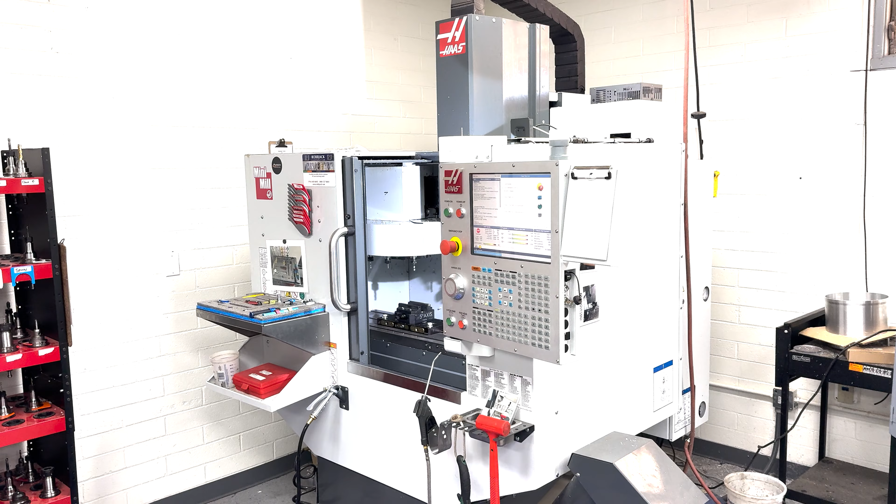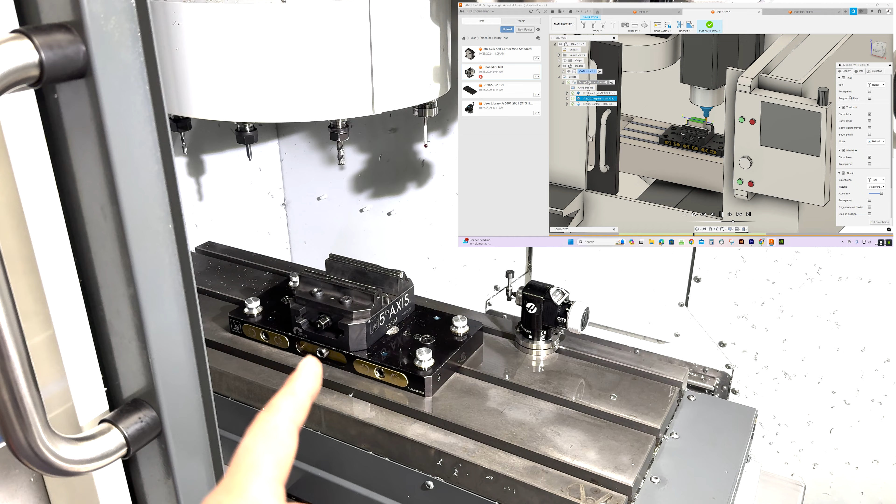Welcome. Today we're going to talk about how to put this machine into the Fusion library so that it will simulate your parts as if it's in the machine. Specifically, we're going to address how we add the OTS, the base, and the vise, and make the vise dynamic so you can set a number for how big the stock is to open and close, and have it all work so when it simulates, it looks like it's running in the machine. Stick around, it's going to be fantastic.

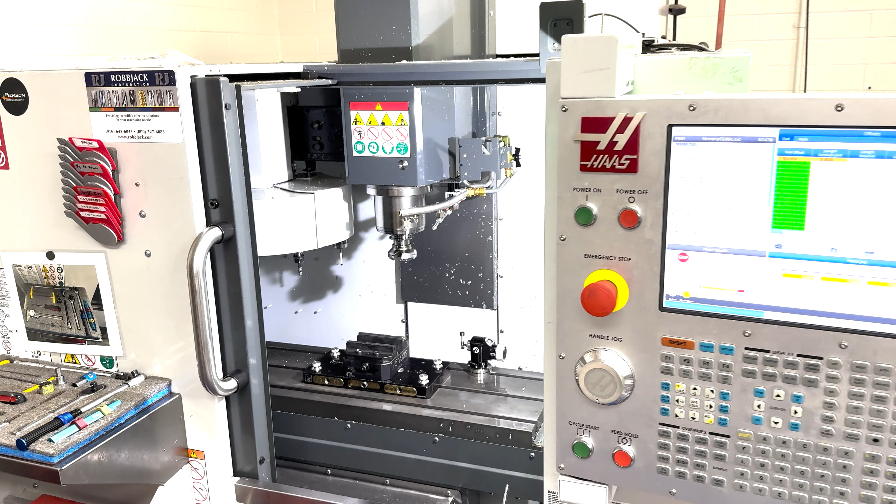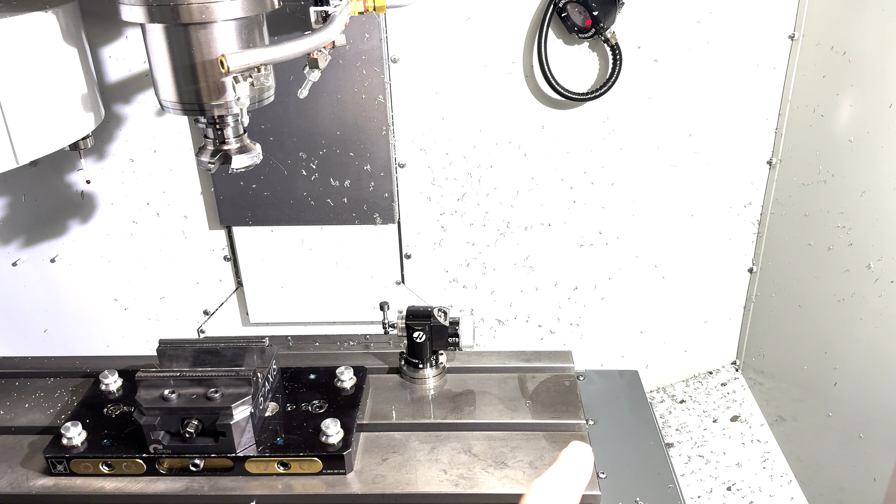Okay, to get started, we are going to take a few measurements. We need to know where the base is on the table as well as the OTS. I've measured from the right-hand side over. The base is 10.5 inches, and the OTS from the right side to the center line is 7 13/16.

So in Fusion, we're going to have to use that 10.5 to place the base plate and that 7 13/16 to place the OTS. But before we can do that, we need to collect all of these peripherals and the machine and get them saved onto your Fusion documents. So let's go ahead and get started with that.

Okay, for those of you that are my students, you will have access to this LHS machine tool library, which is where I have all of the components for our machine shop stored. For those of you out in the World Wide Web, you're going to have to go to websites like GrabCAD, Haas, or even Fusion has the machines, at least some of them downloadable for you, which I'll cover briefly. So let's go ahead and get started.

So those are my students. What you're going to do is you need to copy all of these onto your own. You only have readable versions here, so you're going to have to make a copy, and it's quite simple. You're going to right-click and say copy.

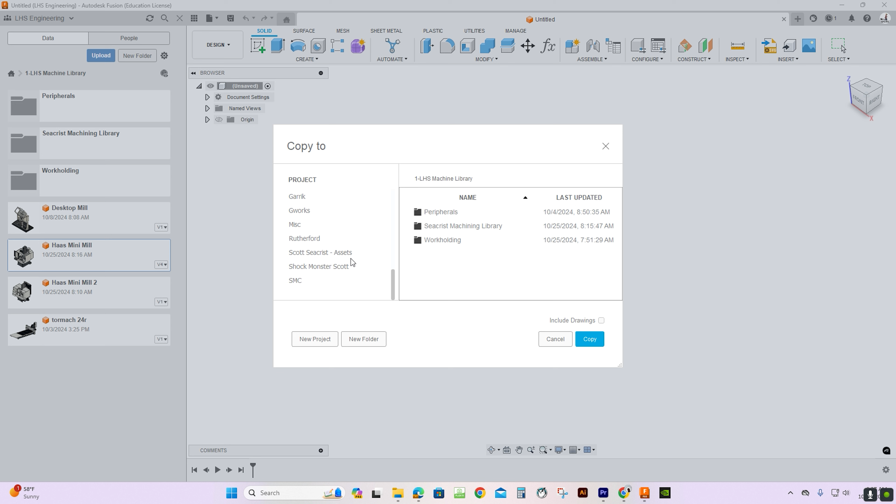And this is our mini mill, and then I made this miscellaneous folder, and I'm going to create a new folder to store all my machine tool parts in, and I'm going to call it machine tool library, and then enter, and then I'm going to open that up, and I'm going to go ahead and make a copy of the Haas mini mill to that location.

And then we're going to need some work holding stuff. So we're going to need a base plate, and on our mini mill it's this one right here. So we're going to go ahead and do copy again, and we're going to put it down there as well.

And then we're also going to need, for this one, from the peripherals, we're going to need the OTS. So go ahead and hit copy. And I'm going to go down here again and save it here. And then the last thing we're going to need is a vise, which is also under work holding and vices.

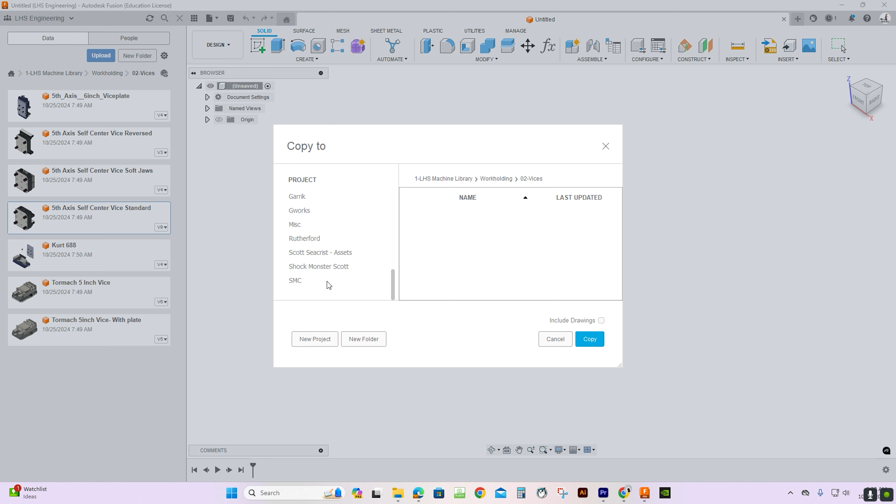For this one, we're going to use this standard 5th axis vise that I'm providing. Copy. And down to miscellaneous and copy it there.

So now we're going to go into our copies and go ahead and open this up. And the first step is we're going to build this machine. So we're going to go ahead and load the mini mill.

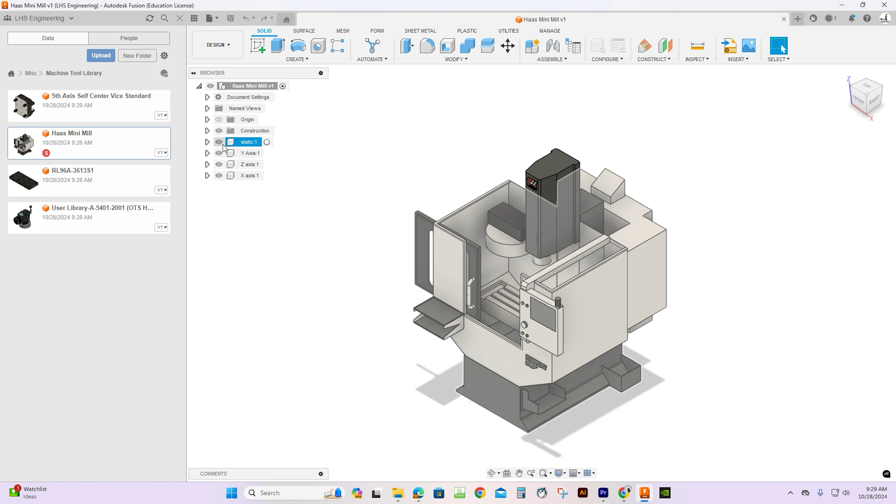And to make our lives a little bit easier, our first step is going to be we're going to turn off statics, which is basically take off all the sheet metal. Now we can see the table. It does exist, it's in the background, so don't worry about it.

The other thing to note is this is all in metric. Haas clearly designs metric, most engineers do. I had an imperial tape measure, but that isn't going to be a big problem, as I'll show you here how we can convert quickly.

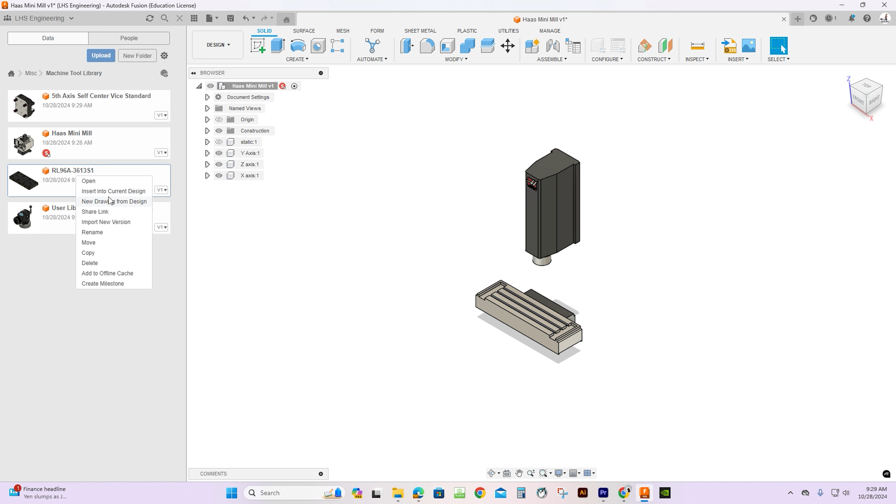So I'm going to start with the base plate, and I'm going to go ahead and say insert into current design, and in it'll come. It's obviously not in the right location.

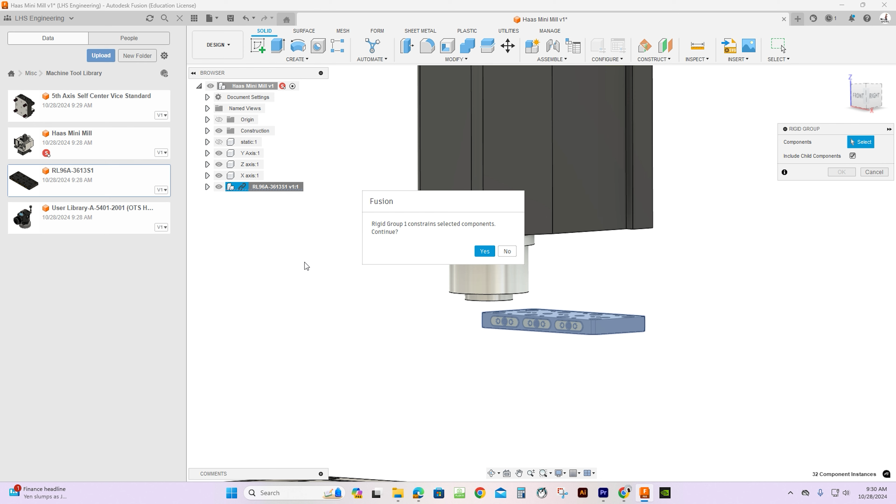One problem with these base plates is they are not a rigid group. So I'm going to go ahead and make this a rigid group. I don't need all these subcomponents to move for this part of the function, so right-click, create a rigid group of that, and click yes and OK, and now this is a rigid group.

Now I know that the grooves here are 20 millimeters wide, so the center of the table would be 10 millimeters from one of these corners. So I am going to assemble this just like I would assemble any other project in Fusion.

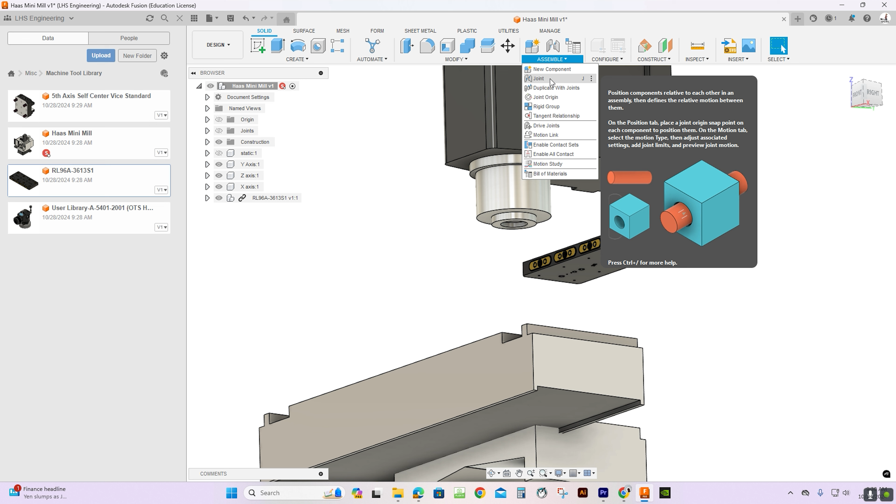So I can go to assembly and joint. Notice it's a hotkey J. So I'm going to come and pick the center of this. If I hold down control, I'll stay on the bottom.

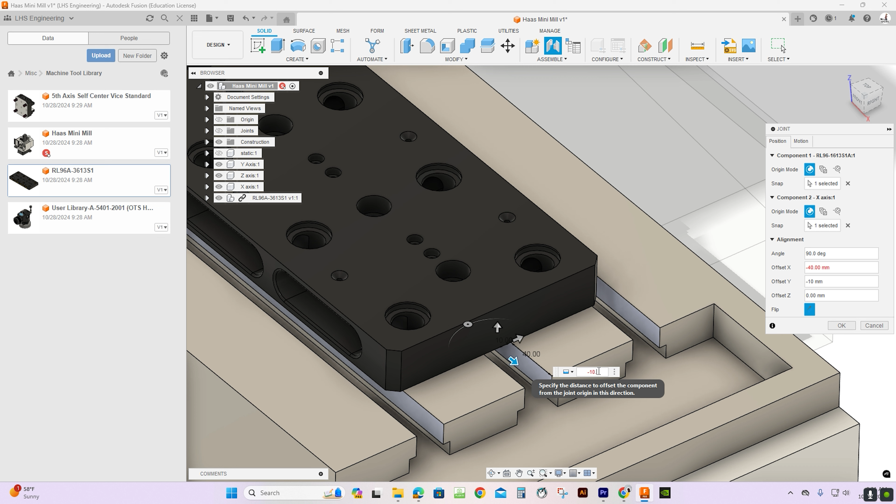Now when it first moves, I'm going to move it to here. All the subcomponents don't come, but they'll follow in a minute. I'm going to drag this the direction I want and type in -10. So now it's in the center. Then I'll drag it in the direction I want and go -10.5 inches, which comes out to 266.7, and press enter. Then all the other components came.

So there's our base plate. I'm going to repeat the process with the OTS.

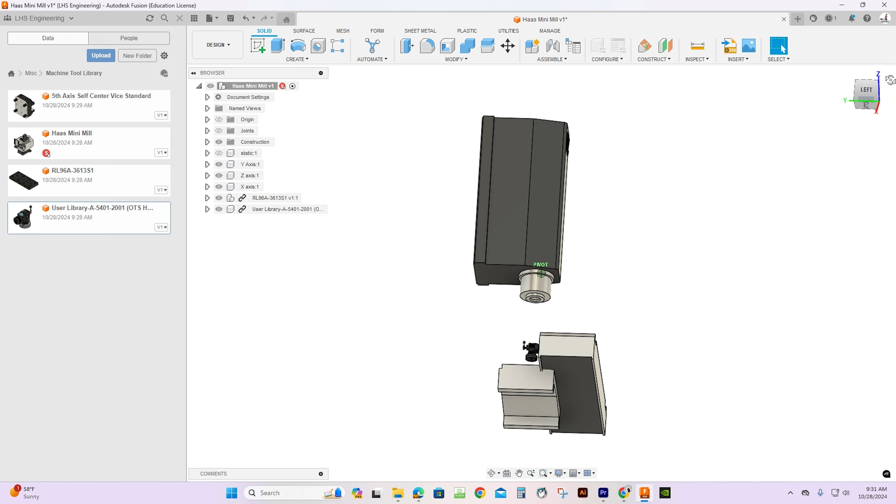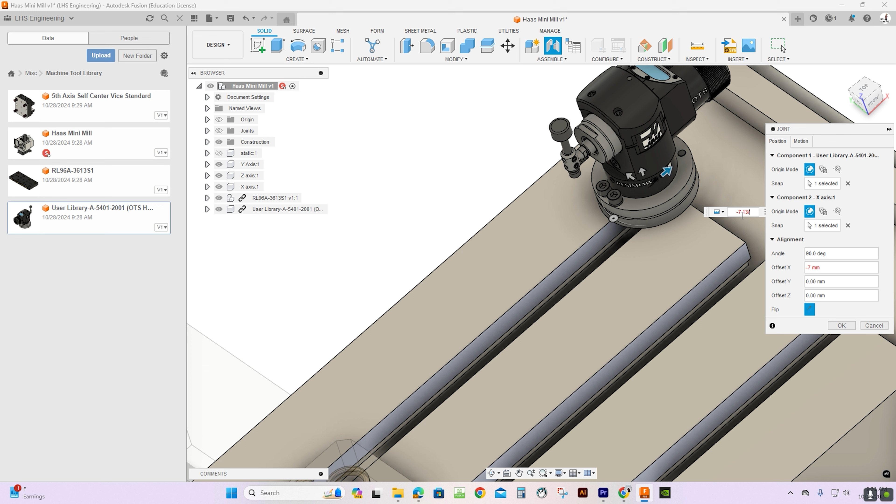Same thing, this one is a single piece, so it doesn't need to be rigid grouped. We're going to go J on the keyboard for joint, and I'm going to select the bottom of this, and select it's on this back T-slot. I'm going to rotate it 90 degrees, which is where ours is, and slide it to -7 13/16 inch, and it will then place it where it goes on our table.

And there we go. Last thing we have to do is we have to put in the vise.

Now I'm going to go ahead and open this vise to show you how it works. I have dynamically put this vise together, meaning that I can go into this function key. If you don't have that function key, it's found under modify near the bottom. And you notice I can establish how wide I want the vise to be open.

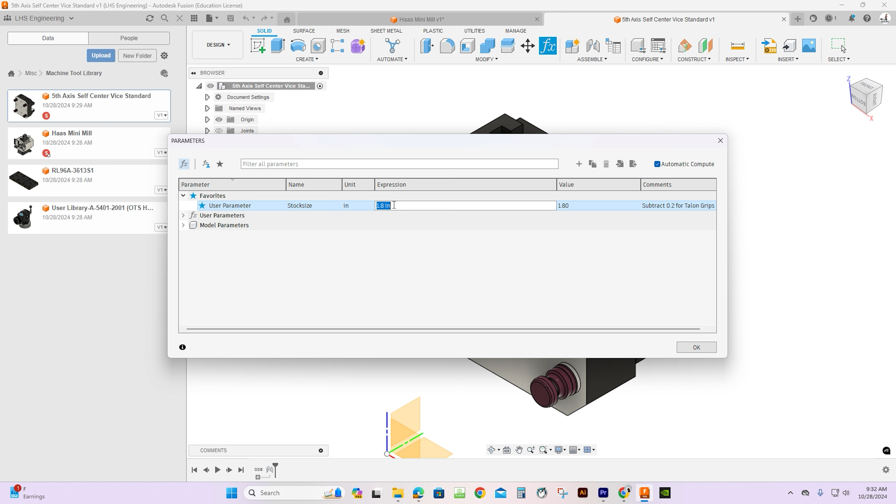In my case, the stock size is 2. If I press enter and click OK, the vise should be open to 2 inches. And I can check that by picking this surface and this surface. Oh, and it's 2.2. That's correct. Oh, I forgot.

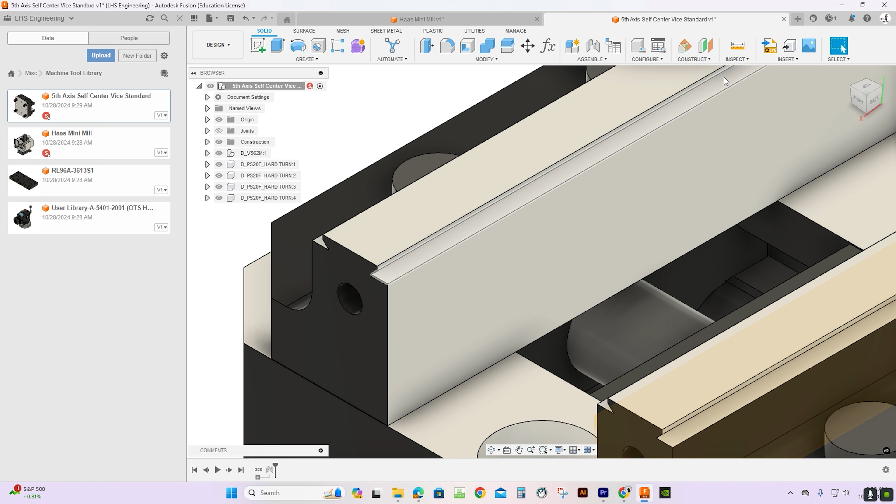The vise jaws are 2.2, but the offset between the dovetails in here is 0.2. So we're going to go ahead and modify this because we're going to be putting it on the dovetail to 1.8 and click OK. So we have that. That's how the device works.

I'm going to save where we are, and I'm going to go ahead and close this. Then I can go ahead and right click after it's done thinking. Right click, insert into current design. And there's my vise. I'm going to click OK.

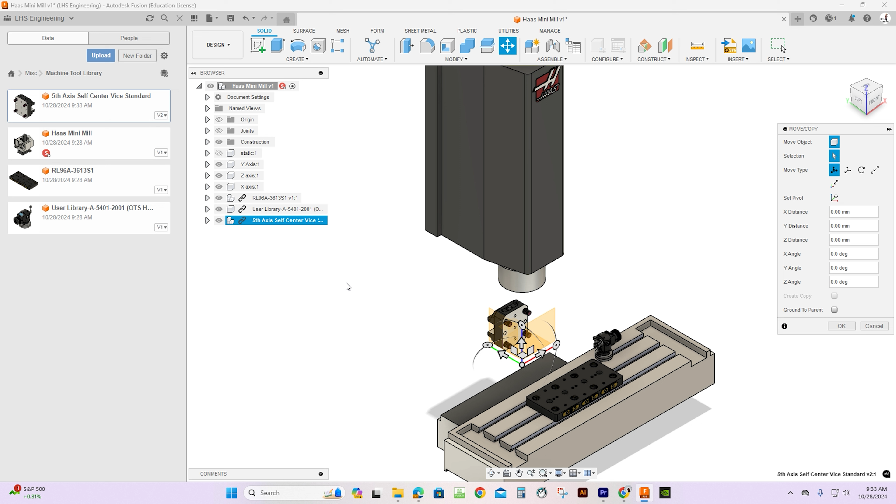Notice the origin is viewable. I'm going to go ahead and turn that off to make our lives a little bit easier. Then I'm going to go J on the keyboard. The easiest way to actually install this vise is this hole in the center is the same as the center of this base plate right there. I don't have to line up all the holes. And I should click OK.

In this case, it will come across. We have a rogue. If I click on it, it'll tell me which one it's on. So it's construction. So now it's gone.

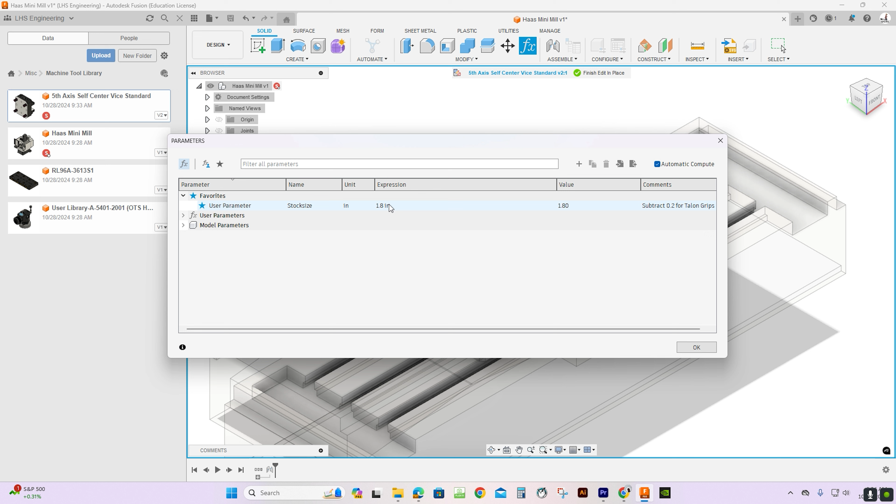But now, if I want to change the vise's size at this point, I can open the mini mill and click on the pencil here, and it's going to allow me to go in and edit the function. Let's just make it 3 so you can see a major change. But it's not going to change until I hit finish. Notice it opened up to 3. Obviously I don't want that, so I'm going to go back and hit finish, and oops, I have to go back twice. There we go. Now we're back to the 2, which is what we're going to use for this simulation.

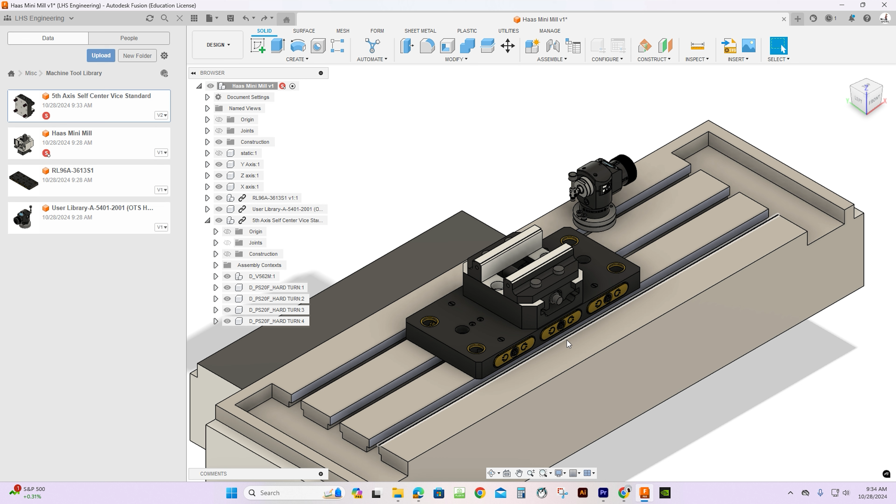So we now have the table all put together as planned, but our problem will be if we simulate it at this point, these parts will not move with the table. They're not attached in the machine library component. So what we're going to now have to do is switch to manufacturing.

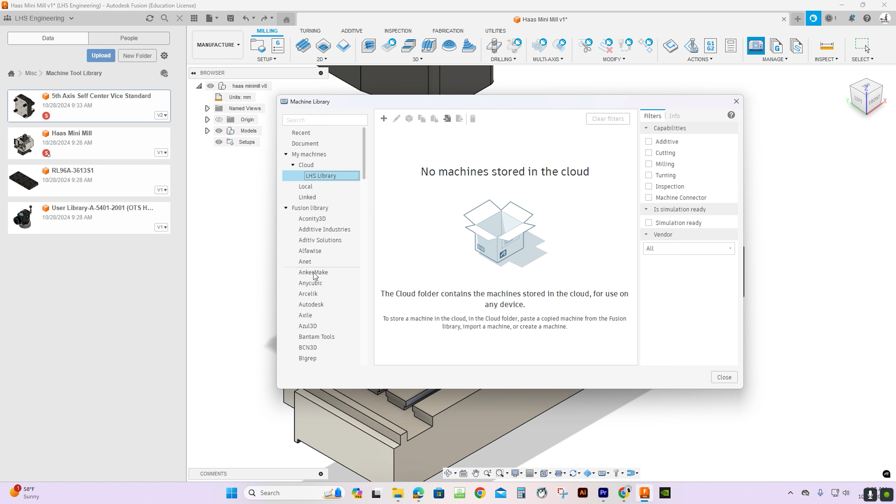Click on machine library. I've made an LHS library by going to cloud and hitting add a folder. Then here I have the option of hitting add a machine. I can also search Fusion's extensive library and import one in, which is the way you could do it with the mini mill. I give you the files, it's easier and less likely for you to make a mistake. But if you are from the World Wide Web, you might want to go this route.

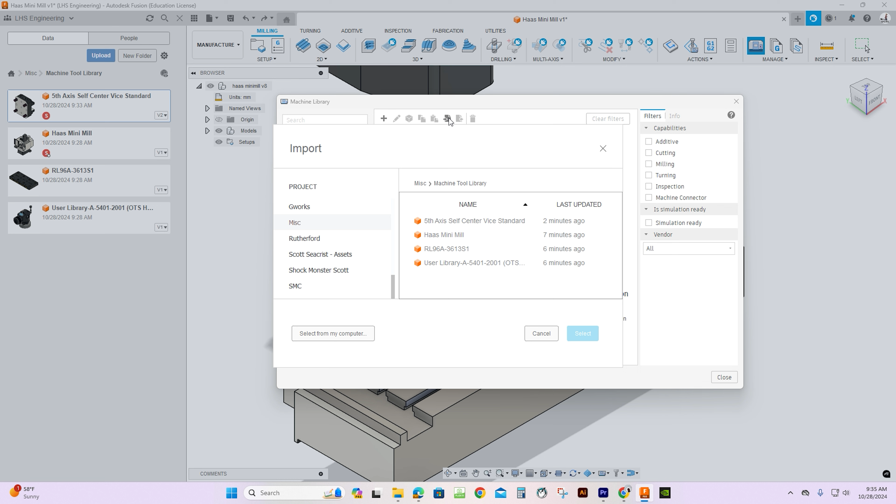But what I'm going to do is go back to my library and import a machine, and in our case it's going to be this mini mill, and I'm going to hit select. It's now imported that into the library.

But we need to do some modifications, so we're going to right click and say edit in machine builder, and we're going to come to this window. Our big problem here is the table will move dynamically with the machine, but our peripherals on top will not, vise and whatnot.

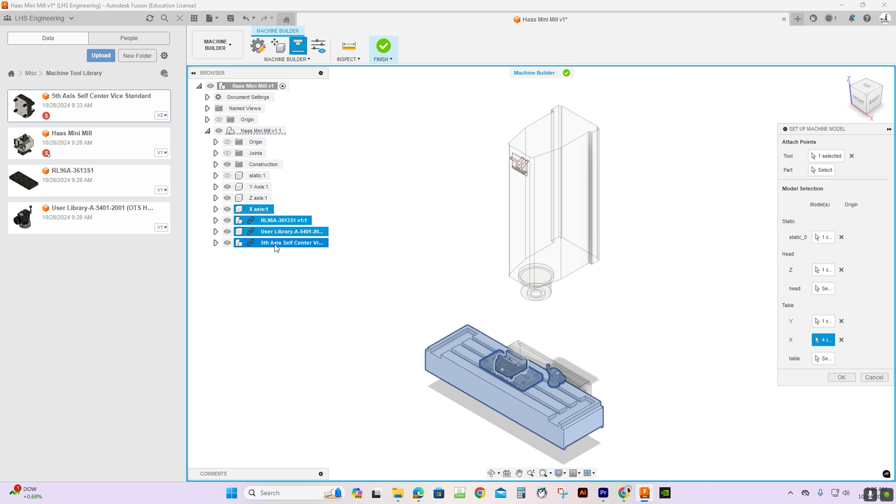So what we have to actually do is go to machine setup, and under X, because all of these are attached to the X to the table, we go ahead and click on X, and we need to add this, and click OK.

Now they are attached. We're going to edit the machine builder again, get back here, and hit close. We happen to already have it open, so it's still open. We are now done with this, and we can hit save.

Okay, we're now going to use our machine tool library to manufacture this part. So to do that, the first step is we got to move to manufacturing. Yours shouldn't have the yellow arrow because I did this then deleted it.

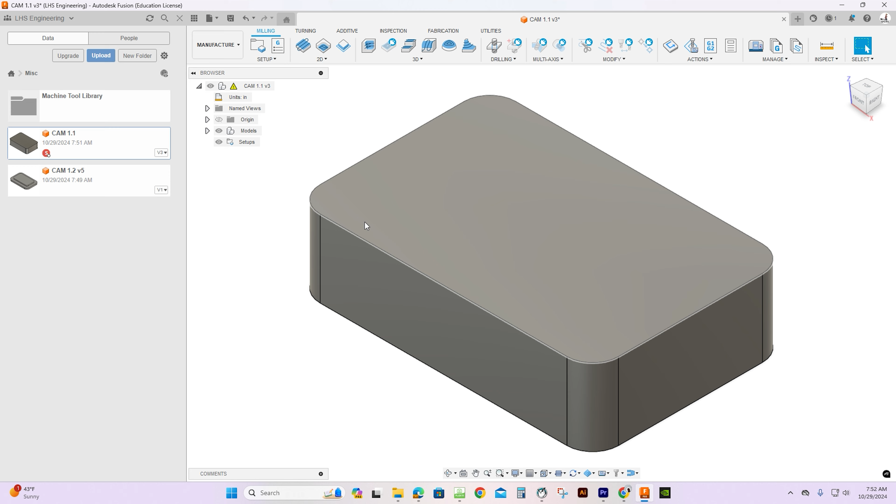The next thing we're going to do is do a setup. The very first thing we're going to do is select machine. We're going to pick the machine that we've created in our library and hit select. You'll notice when we come back in here, we now have 4 tabs as opposed to the original 3. We would then go through this process.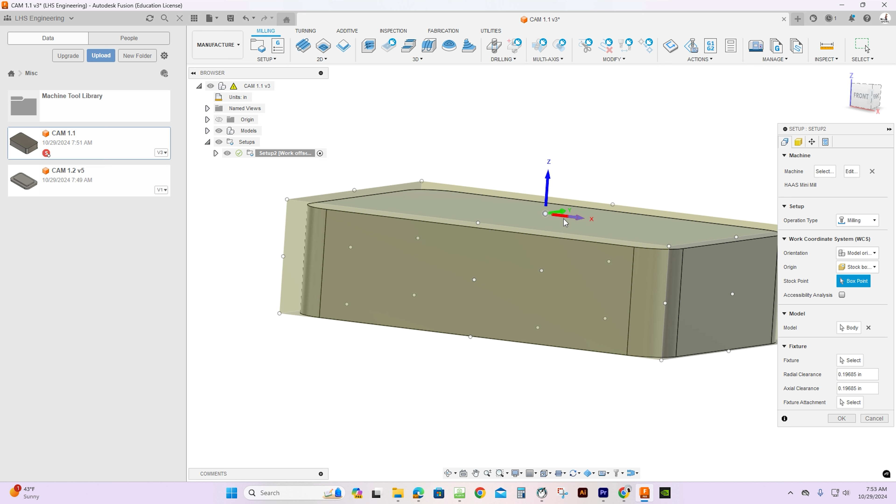Ours happens to come in the way we want it, as far as where the origin is and the world coordinate system arrows pointing the proper direction. So we're going to go to the second tab. We are going to change the stock size always to fix, and we are going to offset it from the top 0.02, which is a standard thing I do in all my classes.

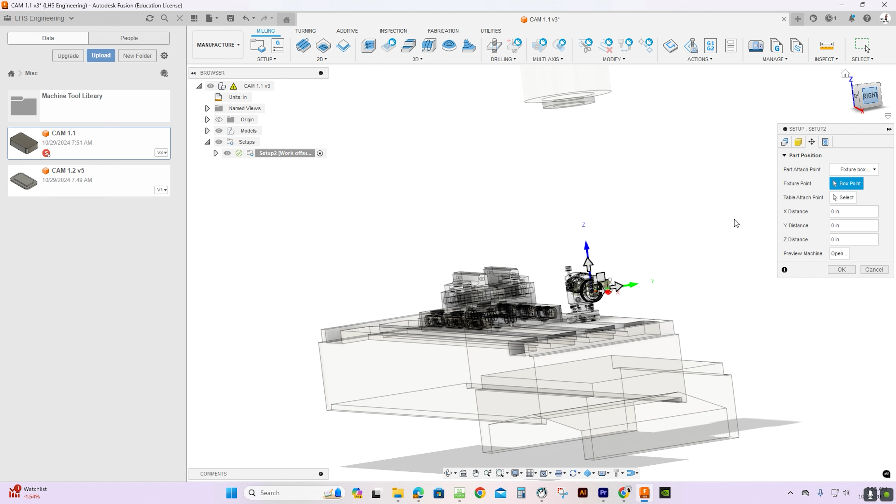Then under position, you'll notice that the block comes in and the machine's not in the right spot, so we're just going to manually move it. The easiest way I find is to start with moving it to the right, and we can move it into the jaws like so.

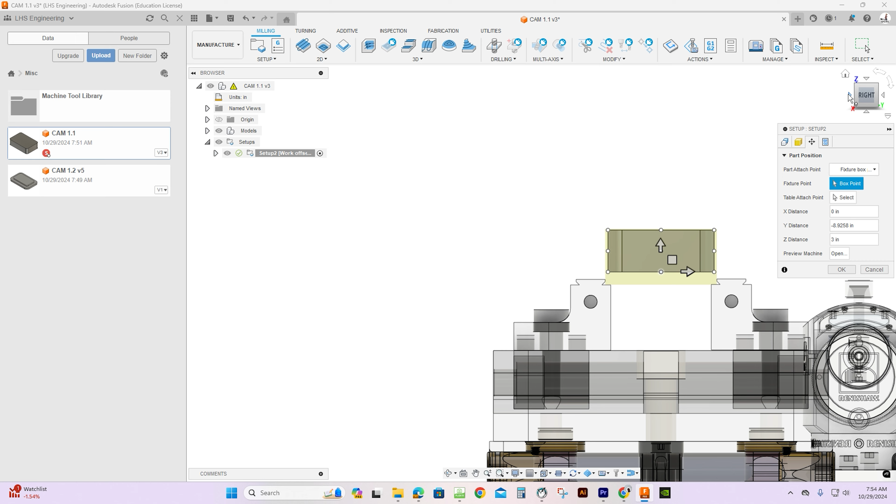We can zoom in and notice that it's off a little bit, so probably 8.9258, maybe. That looks about right. Then we can turn it 90 degrees and make sure that it matches the center of the jaws.

Because we're ultimately going to probe these parts using the probes in the Haas machines, we don't need to align it perfectly. Just eyeballing it in the center is going to work. The main reason we're doing this is to ensure that the cutter doesn't actually collide with the vise.

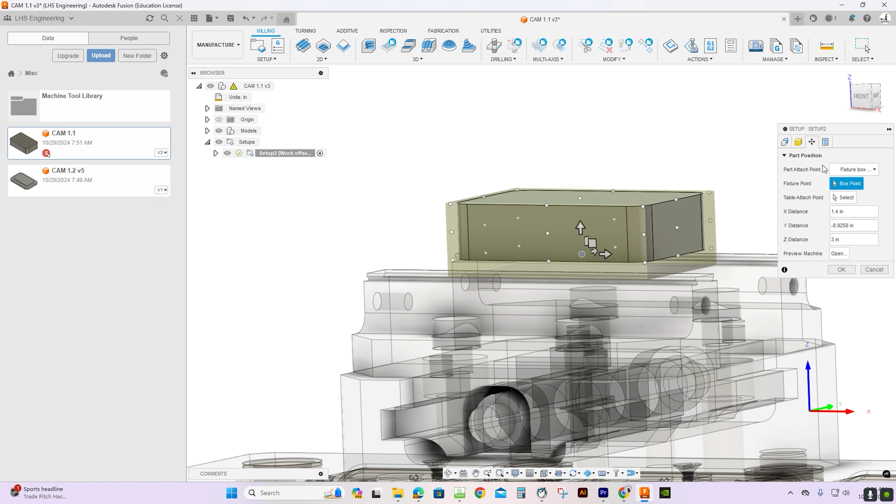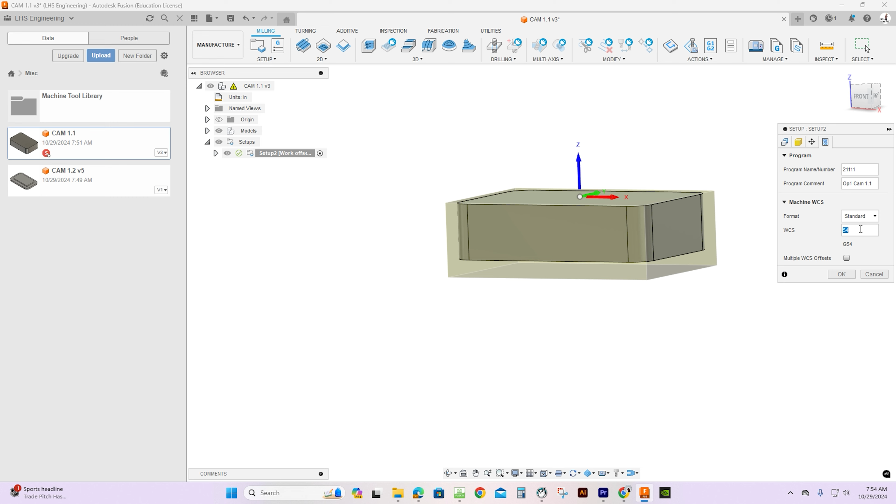And then we would go to our last step, and this would be 21111, and we would call this OP1 cam 1.1. Our work offset is always, in this class, not G54 — it's probably G55. We would go ahead and click OK, and you'll notice now that the machine is placed.

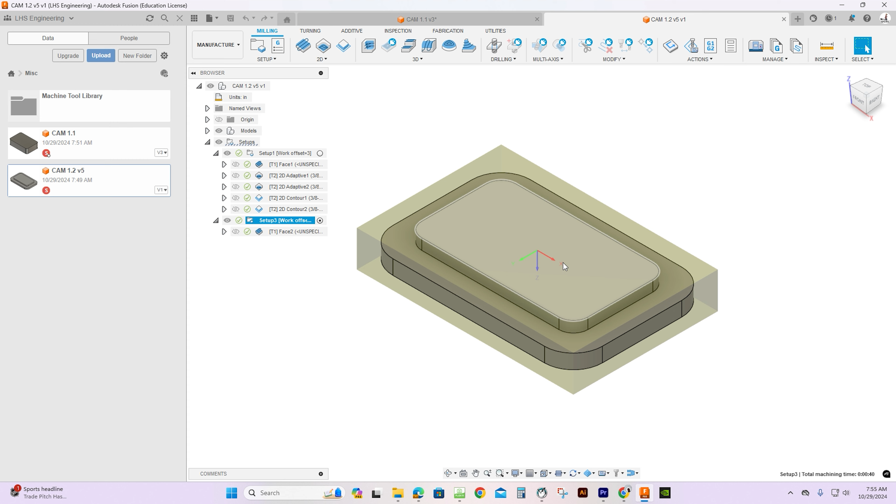And I could go ahead and do all my programming, and then it would run like a simulation. But what happens if we already created a CAM part before we did the machine? So here's a part we've created, and we did all of this before we machined it.

So we're going to start with OP1, go ahead and hit edit, and we can now select machine and choose this. Once again, this tab is going to come up, and I can go here, and then I can move it up. I always like to start on the right to get it in the right position.

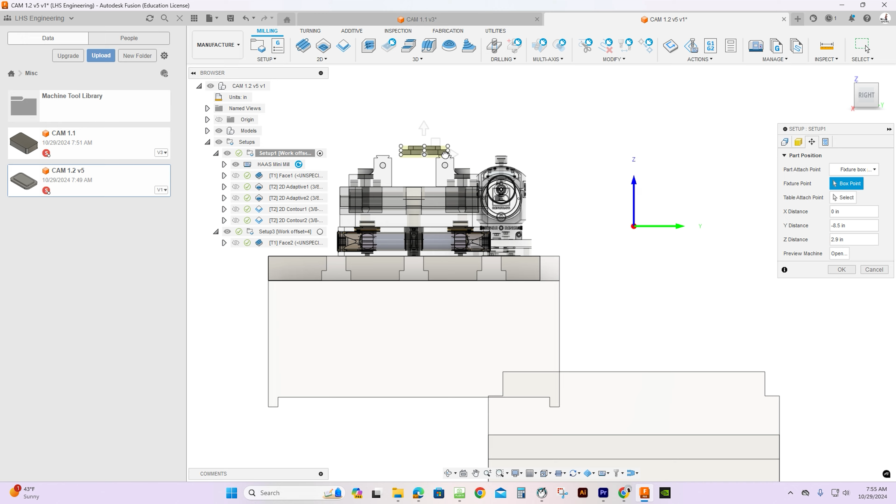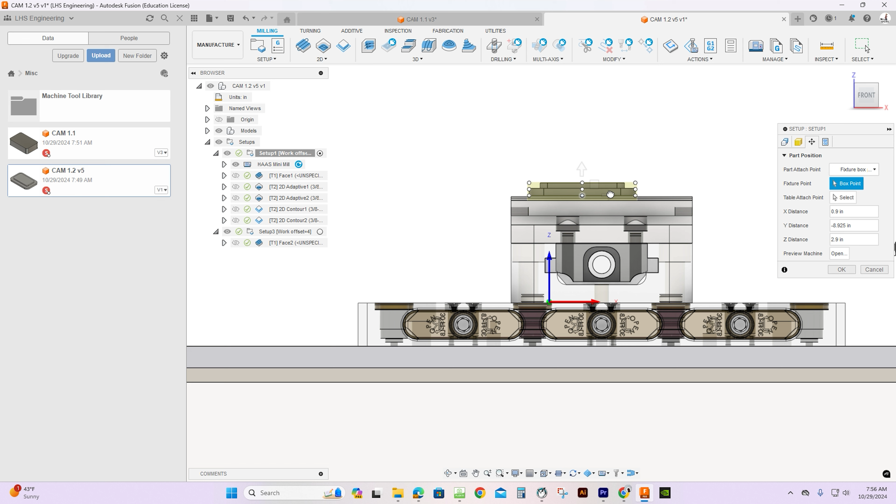Zoom in. My guess is it's going to be 9.1. Nope, this one's going to be 8.925. Looks pretty close. Turn it 90 degrees, and then slide this over once again to get it in the center, and click OK.

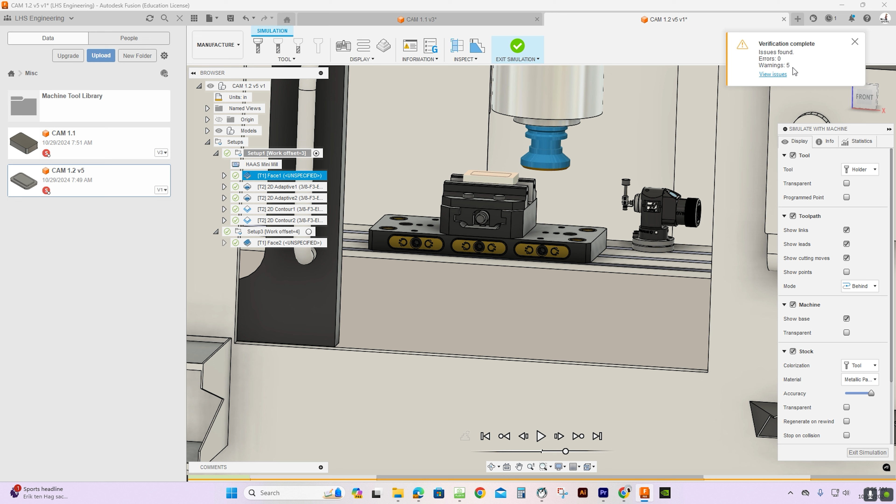We can now go ahead, and now that we have it, if this blue arrow appears, we may need to update machine. There, the machine is now updated, and we can go ahead and go simulate with machine. There we go — it says there's 5 warnings but no errors.

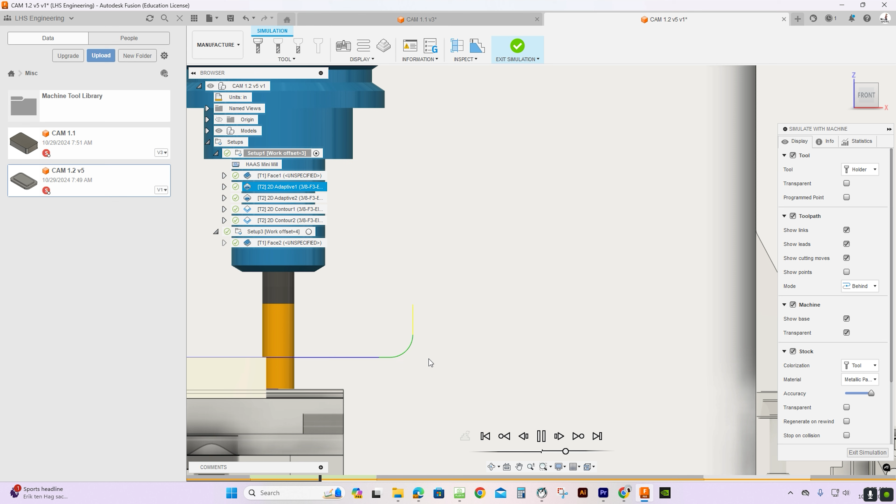So we can go ahead, and if we want to turn off the base, we can click here to get a better view, or we can see it in the machine, or we can make the machine transparent without the base, and hit play. We can watch the cutter go, and zoom in and look directly at the front and see — okay, it's really close to those jaws, but it isn't hitting them.

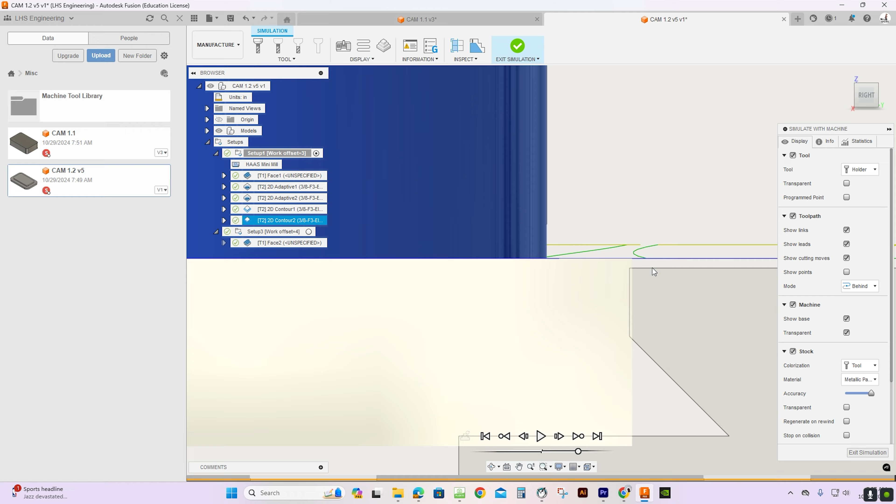And there's our part. We should be able to zoom in, like on the right, and we can see that there is a very small gap between the top of the jaw and the bottom of the cutter. This is why we use machine simulation in Fusion when programming with CAM.